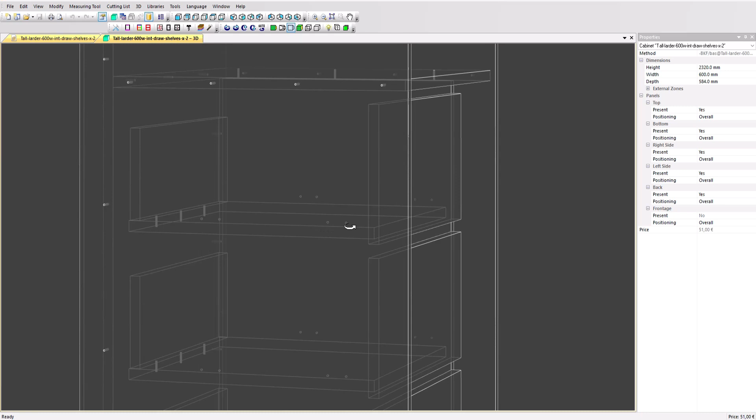Now, to best understand how to approach this, we need to understand how the drawer slides or runners have been applied to this cabinet. So I'm going to click on my drawer front and look at its link with the left-hand side where the runners will be. And I can see that we have both our fitting and our rule, so our positioning rule for that. And if I firstly look at the fitting, it is a Ney Kubox drawer.

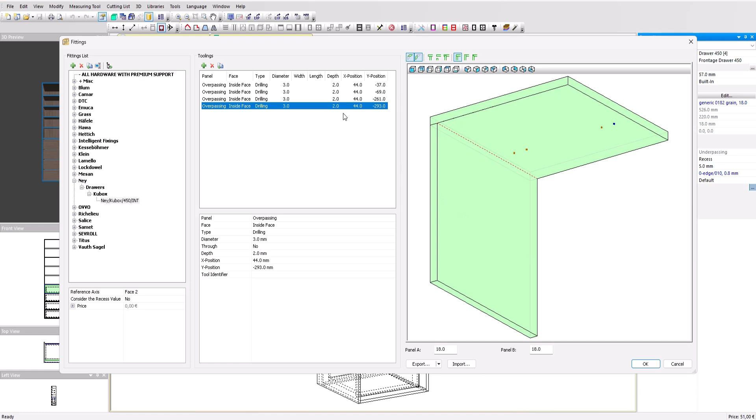And I can see that the runner is set at a height of 44 millimeters, and these are the distances from the front of the drawer for the drillings. Now, 44 millimeters is my height, but let's look also at the rule of application. So if I come into my rule, it's using a single rule, zone inside, offset by 0 millimeters.

So essentially what that means is, let's zoom into this and look at the inner zone that this drawer is in. So this is the zone the drawer is in. My runners need to be up 44 millimeters, and it's being positioned 0 millimeters from the bottom of the zone. So the positioning rule puts the fitting here in this bottom corner, 0 millimeters from the bottom, and then offsets the fitting by the fitting value, which was 44 millimeters up. So it's coming 44 millimeters up from this bottom corner.

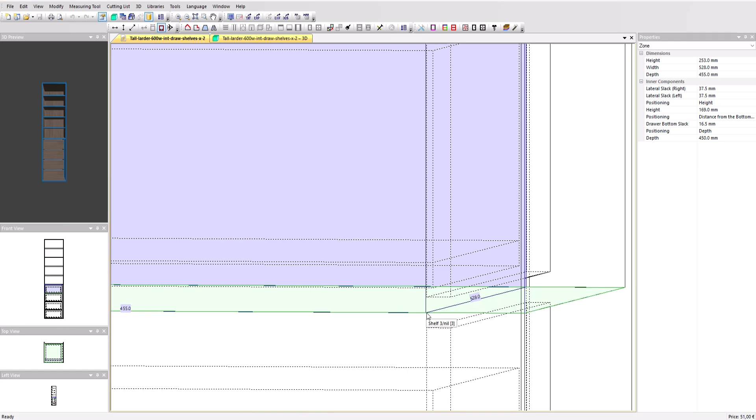So the easiest solution is for me to adjust the rule. Since this needs to be 44 plus 14, I could just move my rule up by 14 millimeters. And then once the starting position is 14 millimeters above the bottom of the zone, I will then get my 44 millimeters up for my runner.

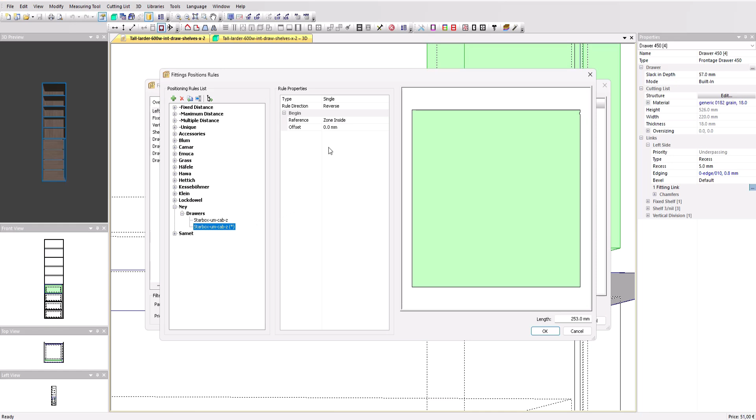So to fix that, let's come back into this view and just adjust my rule. Also, if this is going to upset any other cabinets or projects, I could just duplicate the rule and make a new one and just have a custom one just for this cabinet. But I'm just going to offset this by 14 millimeters.

Now the starting position for my runners will be this overall zone, the bottom corner, come up 14 millimeters, and then do my 44 millimeters of height for the fitting. And you will see that that's going to be in a much better position. That is definitely higher than it was before. If I was to press undo, you'll see the difference. There it was before, and here it is 14 millimeters higher. I hope that's been clear and helpful, and thank you for watching.